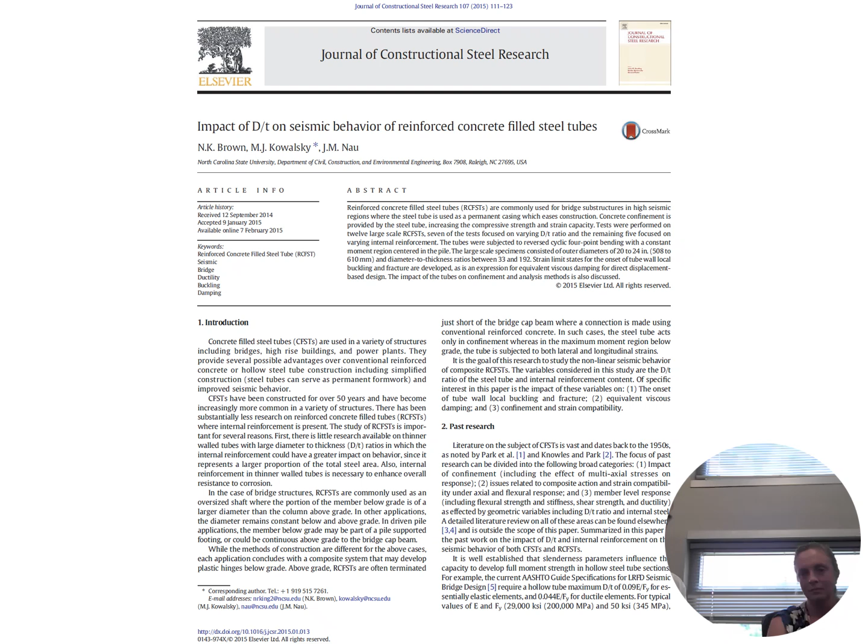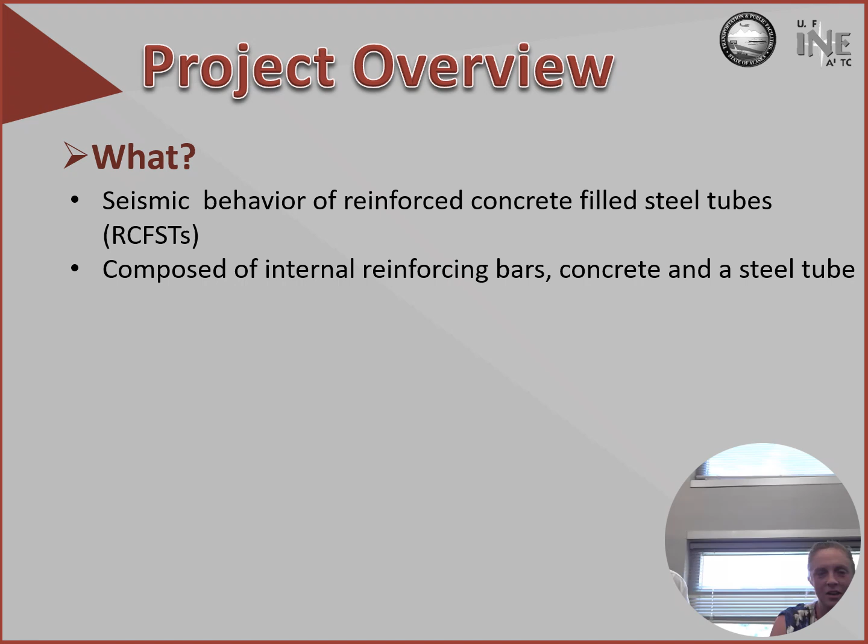So this was the paper, right? The whole point was to summarize all the research on the effect of the diameter to thickness ratio and the seismic behavior of RCFSTs. So, our RCFST has the steel cage inside, and then the reinforced concrete, and then it's all encased in a steel tube.

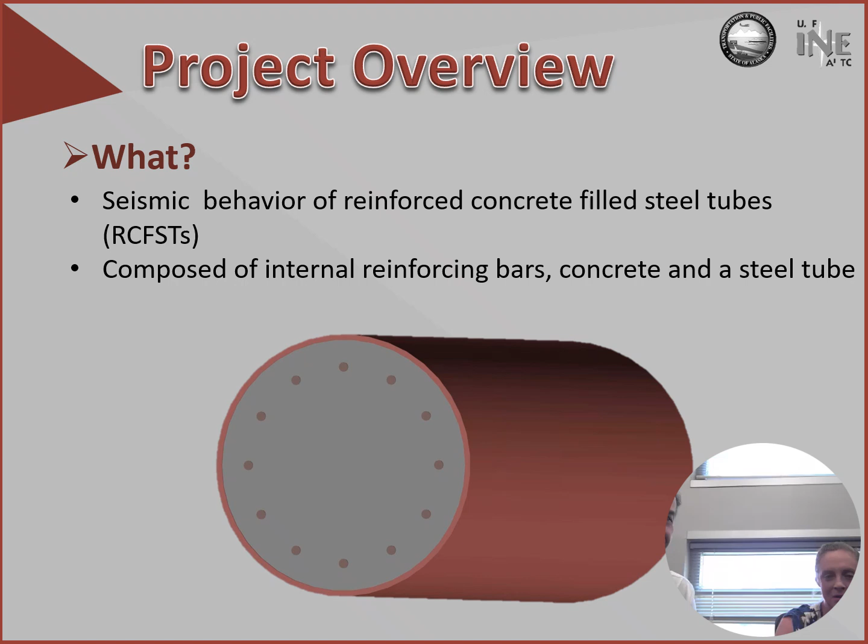Alaska was who the project was for, and they use these a lot. They use those steel pipes as permanent casings, but wanted to start really accounting for them in their seismic capacities, or how to account for their ductility.

And they've been using these for a while. I think that when I was a student at UCSD, they were still using them, and they were developing a new detail between the RCFST and the cap beam way back then. So they had that figured out, but what they didn't really know what to do with was the below-ground part, right?

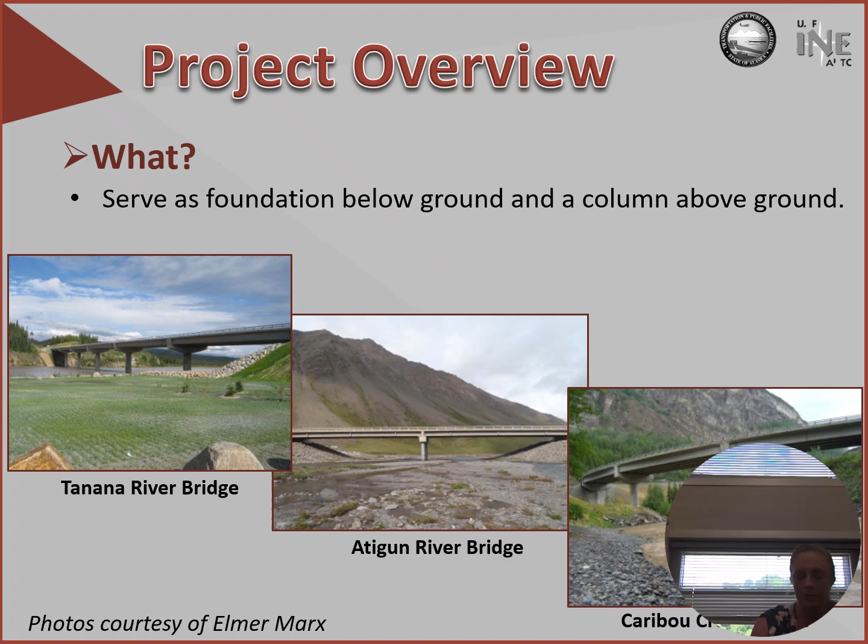The below ground plastic hinge - this just talks about that, how it's built: they drive the pile into the ground, then they drop this cage in, and then they fill it with concrete.

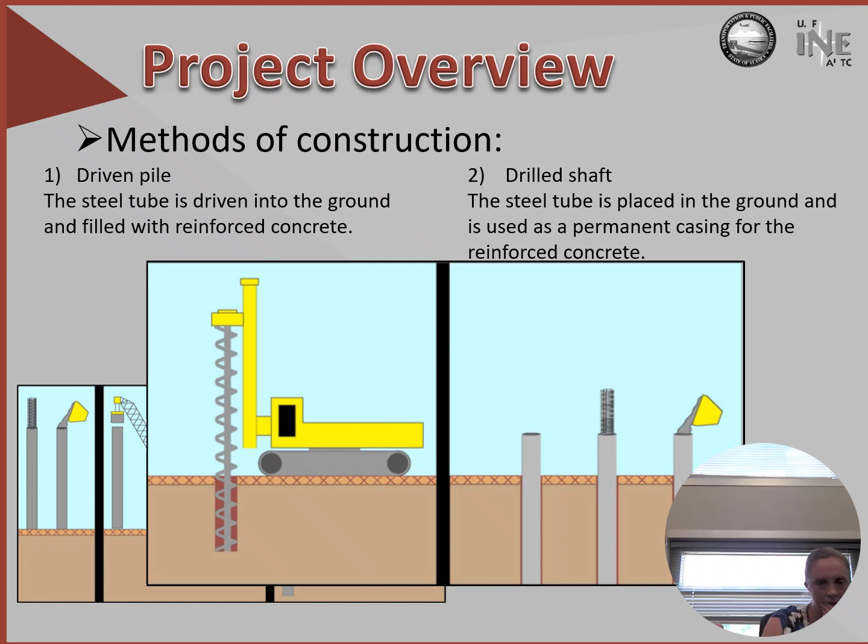They had two different techniques. I don't remember the exact limits, but I recall they would drive them up to a D/T of about 48 or so. They would drive the pile, and for the other one they would pre-drill it, which opens up other opportunities - you get much more flexible pipe, more thin wall pipe. But that calls into question the behavior, how that might change as you change the D over T.

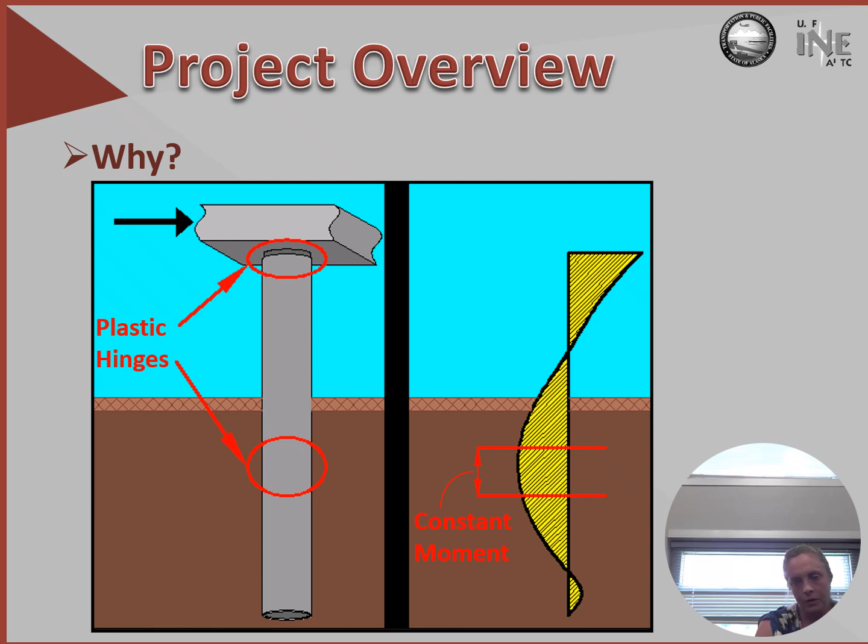During an earthquake event, you have those two plastic hinges, or could have those two plastic hinges, and so we were really focused on that one underground. We had this setup where we had those actuators, and the actuators moved together to mimic the constant moment region, creating that constant moment in the middle of the test specimen.

Did we vary that for this, or keep it the same? We kept it the same - I believe it was 6 feet. In an earlier project we were looking at the effect of that length, and we decided it wasn't significant. So the setup was complicated, but it worked pretty well.

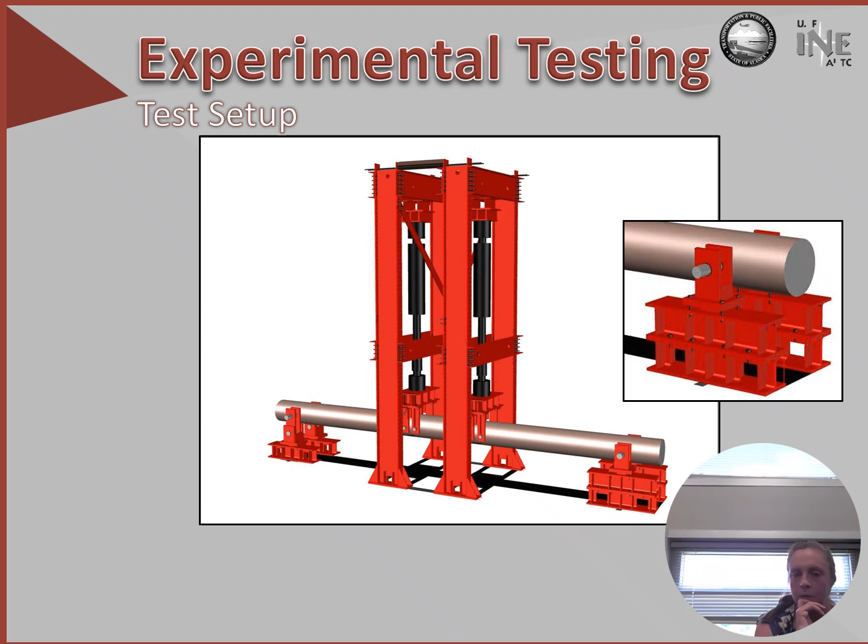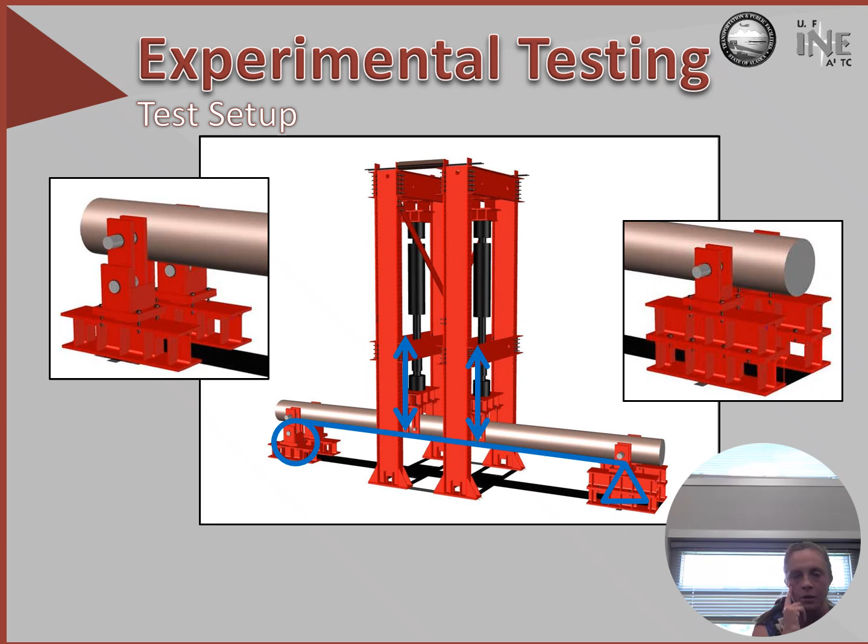So you did reverse cyclic load, with pins through here. We had a pin on one side, and then it was like a roller basically on the other. So the side on the left rotated, whereas the side on the right was essentially fixed for displacement - it could rotate, but it couldn't move.

Instrumentation-wise, we used the string pots and strain gauges, and although we got some information from that, I think we just really used it to verify what the Optotrak was having.

The Optotrak targets - that's the brand name for it, but they're basically little targets that emit infrared light, and these cameras are set so they only record the wavelength of the infrared light. It's not visible to us, but these things emit light at a wavelength of about 1,000 or so nanometers, I think.

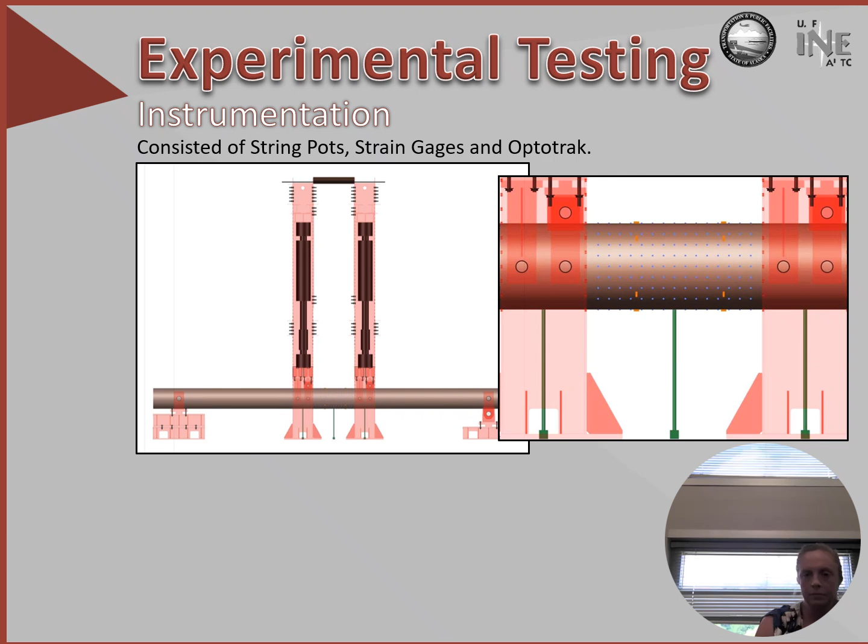And then you can record it - I think we were doing about 1 hertz, but it'll record much faster depending on the number of points you have. For a test like this, that's plenty fast enough, since each test took somewhere like 5 to 8 hours. We've been using these on the shake table recently, and there they're scanning much faster, at a much higher rate.

Yeah, you can see them there - they're all instrumented. These give you an entire strain field - they give you position, and there's the camera that's measuring the position.

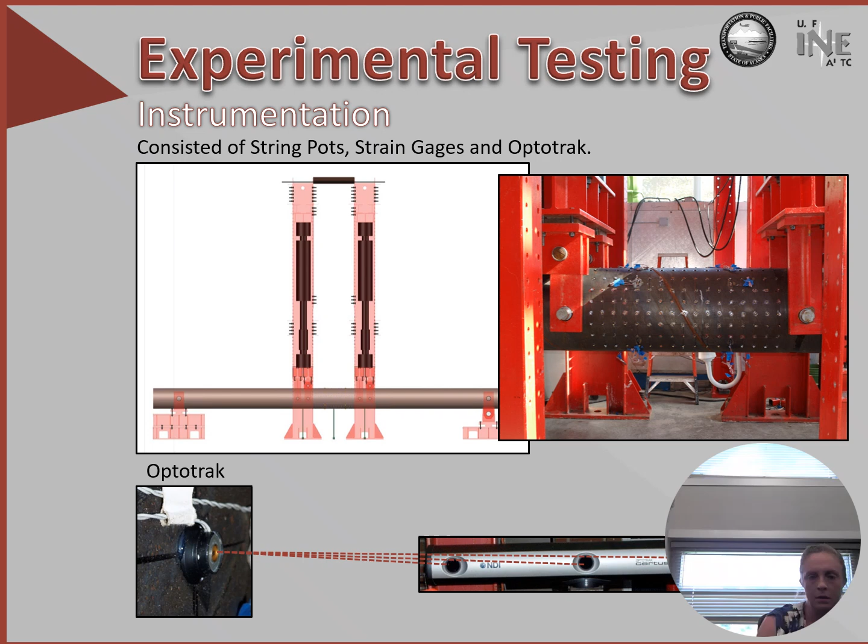Part of the way through, I don't think it was at the beginning, we got another camera and put it up above so we could get the strains on the top too. I think that was the scariest moment in my lab - suspending that camera and being like, oh my gosh, I hope this thing doesn't fall.

We got 3 of them now, so we can get all sides of it. I remember we started with one, and the second one came during your project. I was pretty terrified the first time we lifted that thing with the crane - nobody watched.

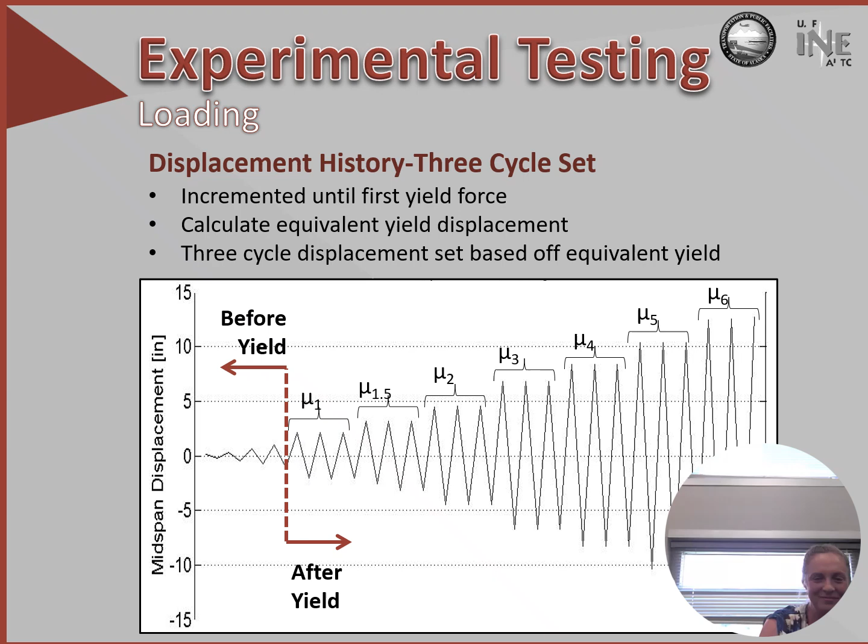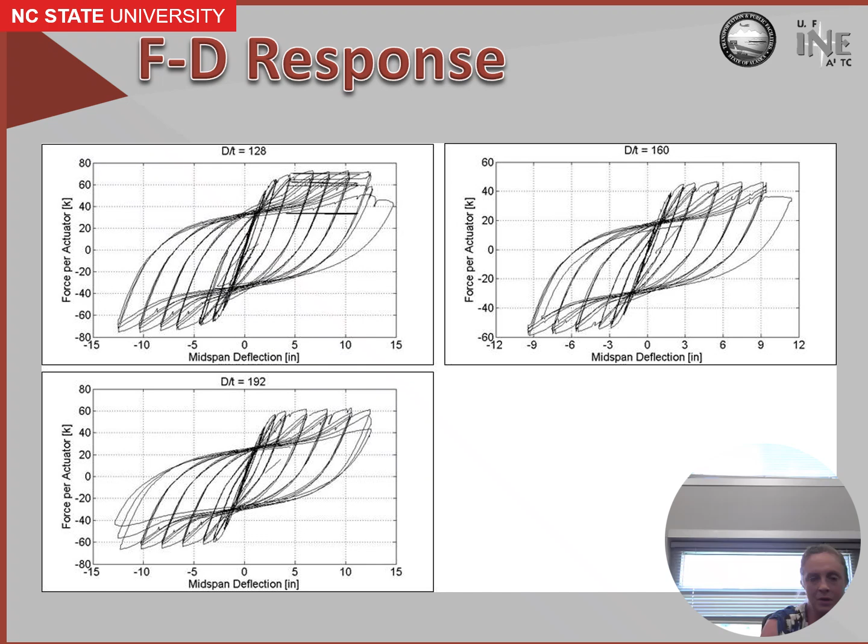You can already start to see it condense a bit. It's even more dramatic, especially by the time you get to that 192. That one buckled, I'm pretty sure, right after yield. Yeah, it buckled really quickly. But what's interesting is, I guess we'll get to that later, is you were still able to maintain strength of the section. That was the key message we got from that.

So this one began at ductility 1. You could barely see, but you can see those buckles a little bit here. They were pretty evenly spaced, all the buckles were evenly spaced, which doesn't really affect any of the strength, but it was just interesting to me.

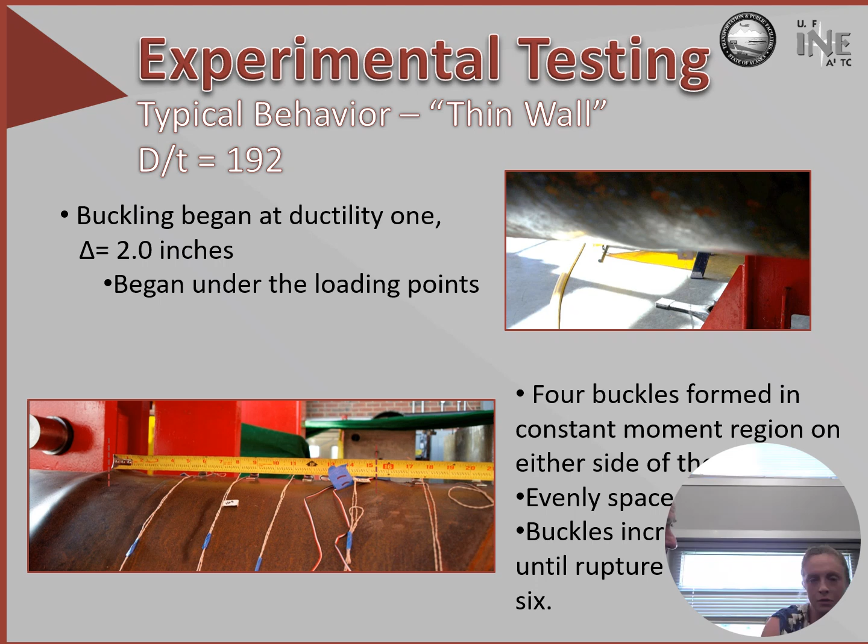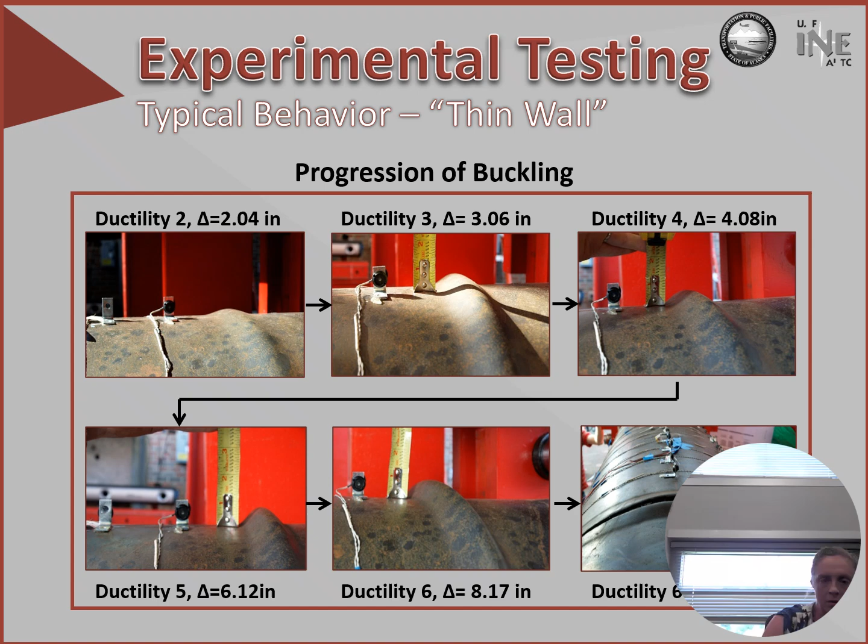It is progressing through. You can see, down at ductility 6, how it's like a triangle, that buckle is really, really tight. So the local strains get pretty high, of course, but still you're able to dissipate the energy until ultimately it fractured. I guess that's probably ductility 7 or 8, 6 point something, I think.

Okay, and then you can see obviously it's not as fat as the other one. And then this is the other extreme. I had to look for those buckles a little more, they're a little harder to find. They didn't start till 5, but then they actually ruptured pretty soon after that.

Yeah, the delay between the buckling and fracture was a lot less. For the thin wall pipe, there's a huge gap between the buckling and the fracture.

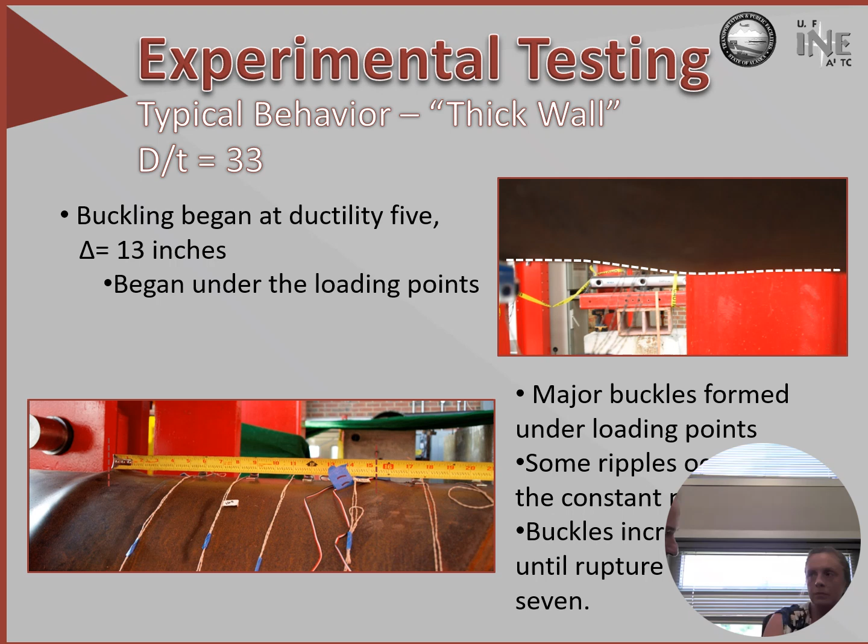I know we can look at it visually, but did we also... I know we do that for the reinforcing steel, where we use the Optotrak to identify buckling. Did we ever do that with this too? Do you remember looking at the markers and when they... Mainly it was just visual, which is easier to see with the pipe, as you can tell.

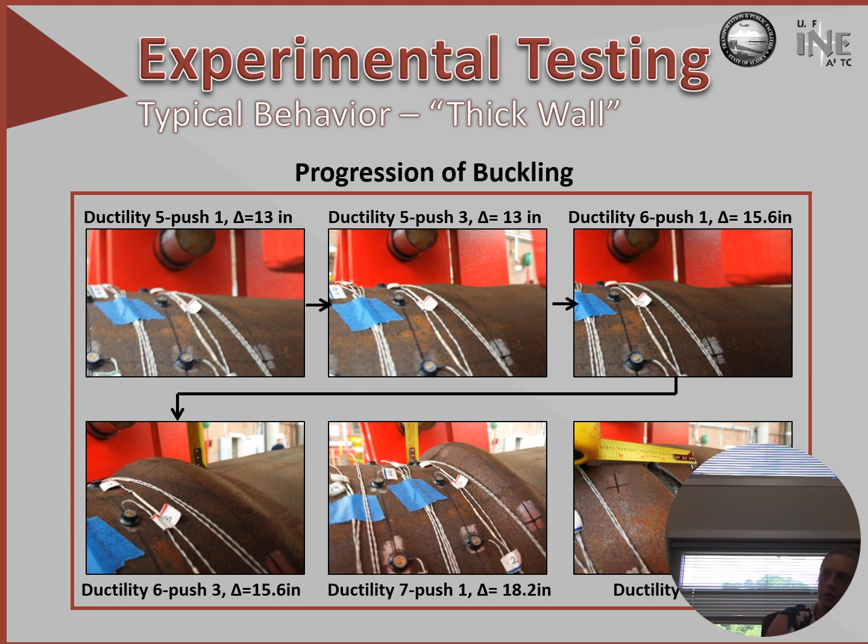And you could see, because once it started buckling, when you tried to plot the stress strain curve across the diameter, at some point you can tell it stopped. So we had to kind of extrapolate what that stress strain curve was to assume what it was going to be in the steel, because we couldn't interpolate it, we had to extrapolate it.

Yeah, and then you can see how this one is obviously a lot fatter, kind of more what you would expect, really. It's almost like a steel structure, right? Yeah, the way you look at the hysteresis.

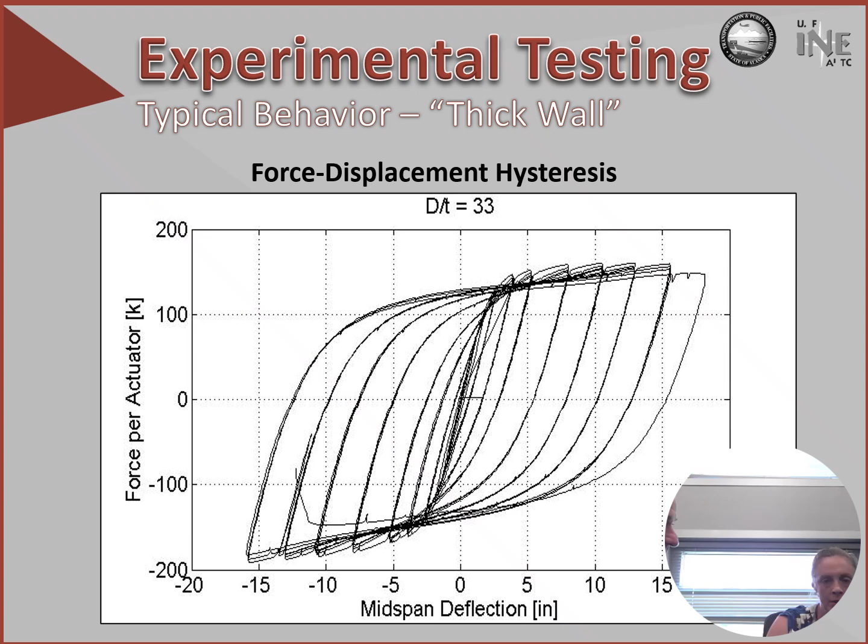And then the measured strains, that's what we were saying. The measured strains, like the displacement between the Optotrak, they weren't actually correct. They weren't representing what was happening in the concrete and in the reinforcing steel.

So we had to average all those out in between the buckles, and assume that it was the same across the whole length. But you had a lot of points there, so you could get the cross section strain pretty readily, and all those strains in the middle would be okay.

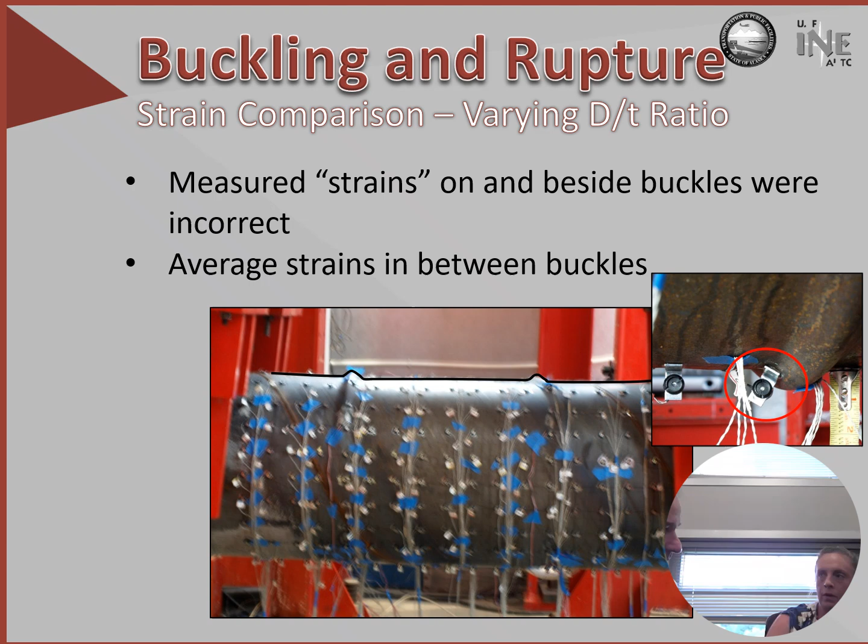But those ones right around the buckle, I think if I remember correctly, I did one for each column, and then if it was outside of a certain factor, I would discount that and average them again, to get rid of the outliers that way, instead of doing it one by one, more of a mathematical, systematic approach.

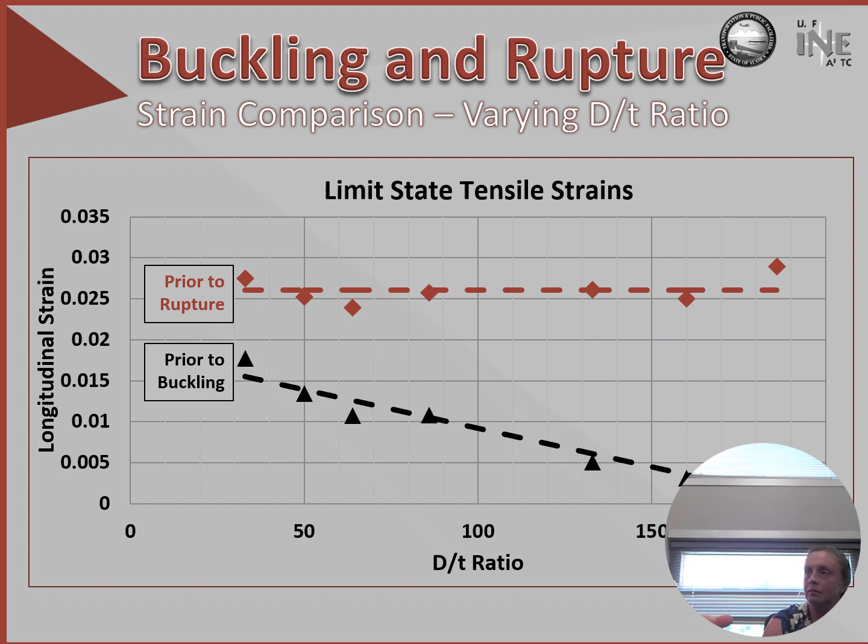And yeah, that was obviously the interesting part. I remember in that first test, when that really thin pipe buckled, we're like, oh, this is gonna be over soon, and it kept going. Once we started doing more tests and putting more on this chart, we realized that the rupture happened pretty much at the same strain. It didn't really matter, it wasn't affected by that, it was just the onset of buckling. So if you're worried about serviceability, that might be a concern, but not in terms of strength, it was never really an issue.

And then, back to the damping, I think we thought by looking at this that it was going to be pretty significant. Yeah, just the shape of the loop.

I mean, here you can see them just isolated, right? This is, I don't know what ductility that is, but it's a pretty sizable ductility. You can tell the difference visually - it's a lot.

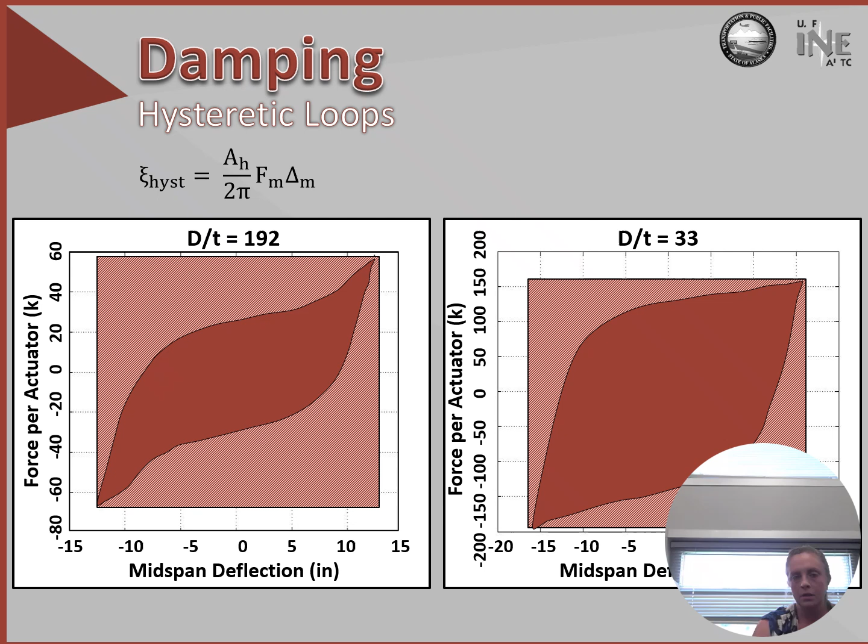So we thought maybe it's worthwhile to investigate the damping. I looked at the damping that way and came up with those equations. There is some difference - it looks like it goes from, oh man, it's been a while, 15 to 17%. Exactly, around there, 15 to 18%, something like that. Once you go through and develop it, the area is significantly different, but once you do the actual calculations for equivalent viscous damping, that difference starts to dissipate a little bit.

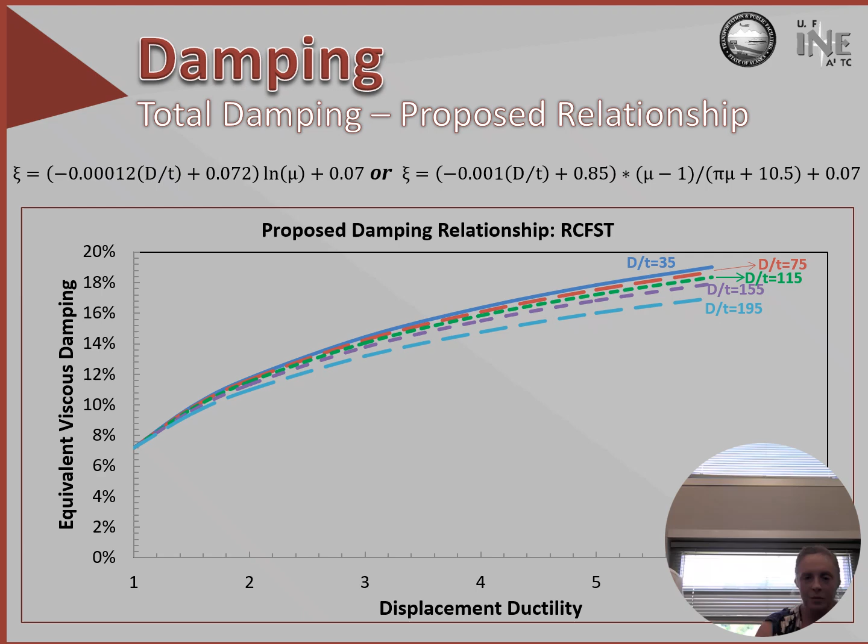But it was enough, more than you would expect, like in reinforced concrete. You have less scatter than this, and it was following what you'd expect - higher D over T, lower damping. So it kind of showed the relationship between the steel and the concrete - how it's not really truly one or the other.

And the strain compatibility, as I mentioned, since I've been working this is the one question that has come up every time - whether we can say it's one section or not. And on one of your tests, you put it outside of the constant moment region, because we didn't want a big hole in the pipe. So we cut that hole.

I don't remember - I think it was one hole we cut, and we put the Optotrak markers on, or the little markers on the concrete itself, and then on the steel around it. We had markers on - because you cut a little hole and put a marker in the concrete, with one parallel to it. I think it was like a bunch of little holes, maybe a lot of them, so we could get both, if I remember correctly.

And then you saw the strains were the same. I think it probably slipped a little bit, but overall it didn't actually change the calculated strength. And even in that constant moment region, when we calculated what we thought yield moment and ultimate moment would be, they were matching as if it was one composite section.

So whether - that's the proof, right? Right, that's the proof. So whether it slips a little bit or not is not really the issue in this scenario.

A lot of it is the bond - the fact that once you start deforming and get the curvature, that provides you with some of that bond to ensure that plane sections remain more or less plane. They're pushing together. It's not like you're just pushing on the concrete section - it's not an axial push on the core. You're not just putting it on the core, right? It does all act as one section.

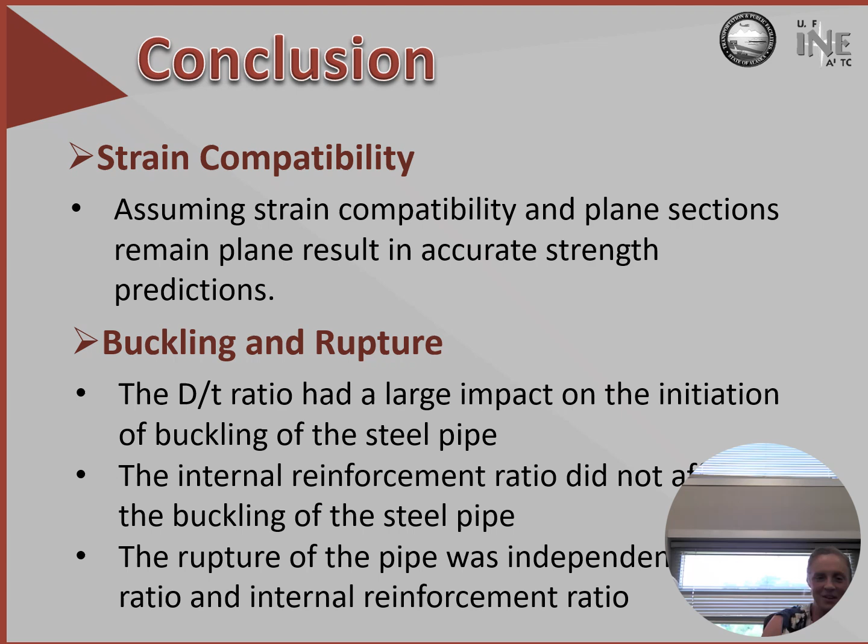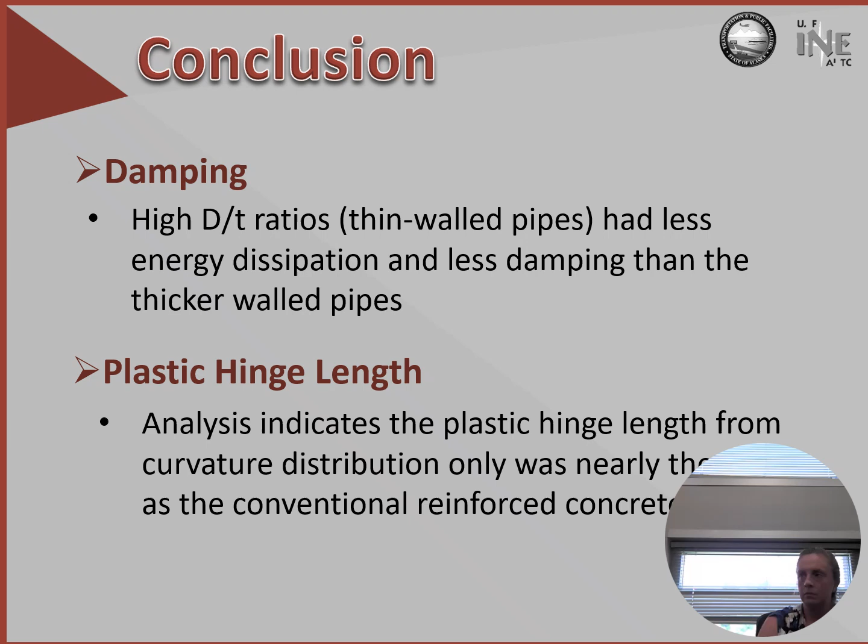And then we covered most of this - the damping, the high D over T ratios. Those really thin walls have less energy dissipation. And then these have been used - these are constantly being used by Alaska DOT, and as a consequence of this, now they're able to really deploy this in a manner that lets them calculate the strength of the in-ground hinge if they're worried about it, like in a single column bent - that would definitely happen. In a multi-column bent for the D over T of 192, it might happen because the strengths are not that different.

Future research - this is interesting. We kept this, right? I said wait a second, this was 2015, we actually did some of this. I think we had the pipe piles and the soil. You guys did that - that came after you. That's what I thought, that was Diego Guede. So maybe we'll have to have him do the next presentation so we can pick up with that. We did that - just been voluntold. Exactly.

I mean, not that it wasn't significant, but all it did was correlate to what we had shown in the lab, which was obviously what's happening in real life. So, okay, that was good.

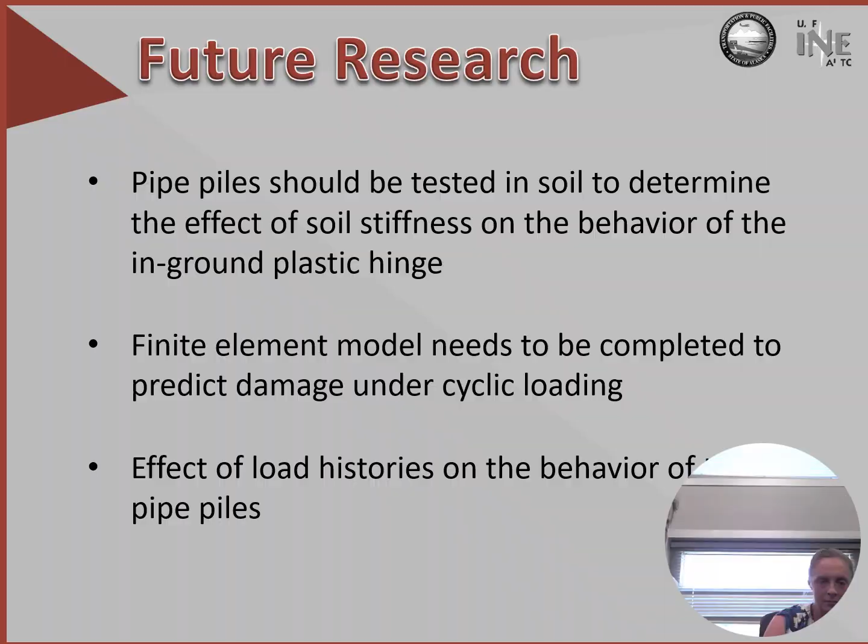So what about now? What are you up to? Do you want to talk about what you're up to nowadays?

So I'm a senior bridge engineer at STV. I do more the technical side of things—some project management, but more focus on technical. I actually don't do a whole lot of seismic, but I am right now, so it just happens to work out that way. I have some projects in South Carolina where we're doing seismic design and seismic checks, but really just working on bridge projects throughout the Southeast—North Carolina, Tennessee, South Carolina. A lot of steel design, and some concrete design too, reinforced concrete and pre-stressed girders. Just a little bit of everything. It's fun though.